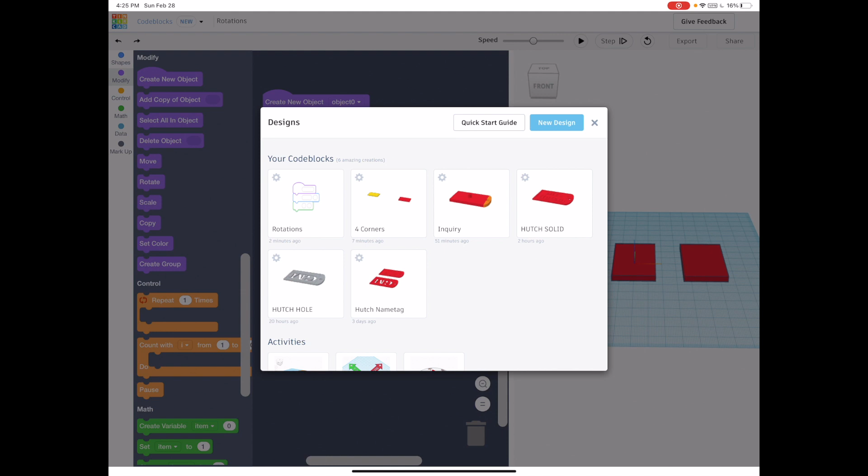All right, we are on your next challenge, which is going to be called grouping.

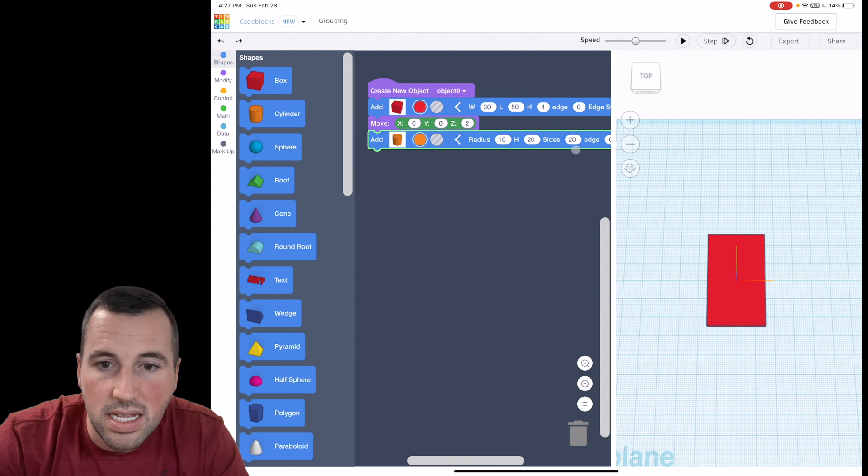So let's go ahead and add a new shape. We're going to pull down the cylinder. Okay, and right away open up the drawer, and let's go ahead and get our cylinder adjusted here.

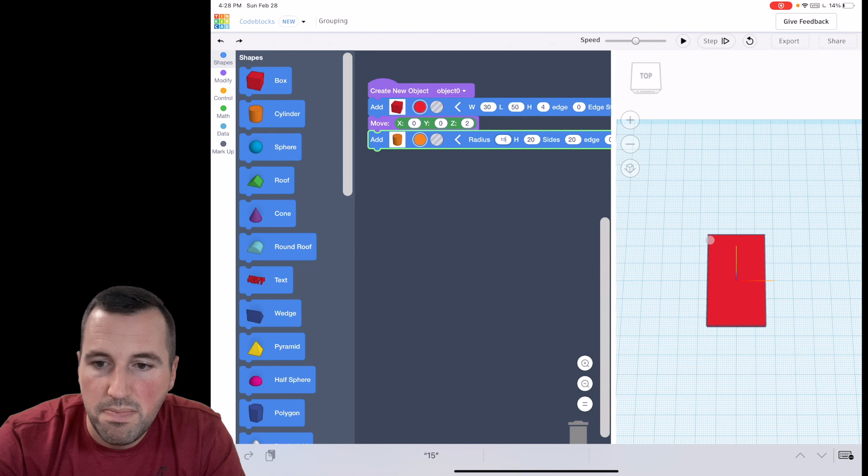The width of my rectangle is 30, so I'm going to have the radius match that. Remember, it's a radius, not a diameter, so we're dealing with halves. So if my radius is 15, then it'll be the distance of 30 across.

Let's go ahead and bring out our move block just because we know we're going to have to. And I'm going to zoom out a little bit here so we can see what's going on. And then our height is at 20. I definitely don't want a cylinder that big. Like if you take a look, that's pretty giant. That's definitely not what we're looking for.

So I need my cylinder height to be matching our rectangle, and that is a height of 4. So we'll go ahead and do that and hit play.

All right, so now it matches, but we got to move it up from underneath the work plane, and I already have my move block there, and let's go ahead and raise it up. So now you can see it gets all funky when it's meshed with it because it has to show both objects. So that's what that's doing there. Almost looks like a spinning wheel.

All right, now I want to create a shape up top that's sort of arched where like a keychain hole would go. And so we need to move it up this way on our y-axis.

Now, again, you could guess and check, and it's a valid method, but I'd rather just do it accurately. So here's the center of my shape, and I want to move it 10, 20, 25 millimeters up. And so I'm going to go to my y, and we're going positive 25. And let's hit play and see where it moves.

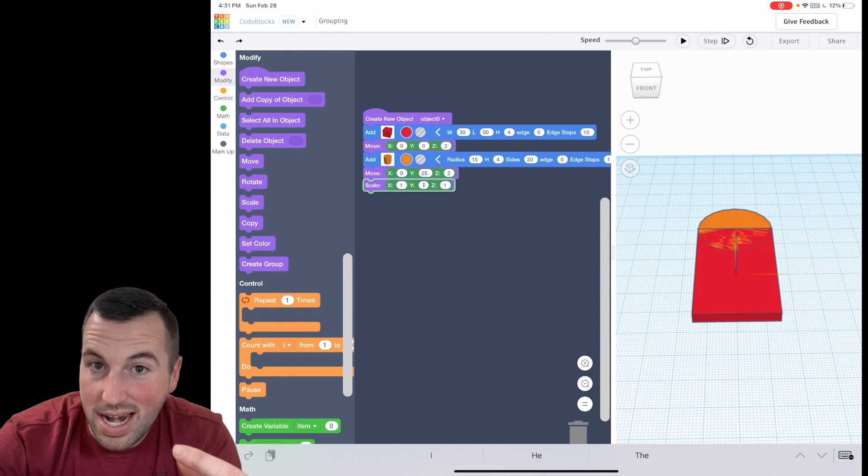All right, now we're reducing. So right now it's at 1. If I want to reduce, I have to go to 0.5, I'm reducing it by half. Okay, hit play. And there we go, it shrunk it up. Now, if you want it shrunk a little bit more, you can adjust those by tenths and shrink it a little bit more if you want. Okay, so it's all about just manipulating it how you want.

All right, now I do want to adjust those sides because remember how sort of choppy they are? I want them to be smooth. So let's mess with the edge and just increase that number like crazy, and adjust the sides. And we'll also do the edge steps. So we'll just put 200 on everything and hit play and see if it smooths it out a little bit.

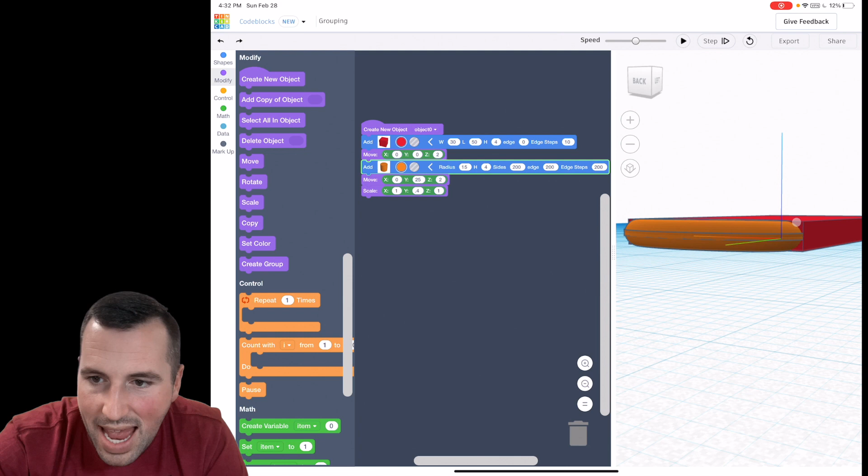Oh yeah, look at that. That's beautiful. Super nice and smooth. Now, one thing I got to be careful about is I smoothed it so much that if you look here, I sort of lost some of my edge here. So that's something I have to be aware of. If I wanted that to be sort of a solid thing, I'm going to need to get that adjusted back a little bit. So let's mess with our edge and edge steps here and see how we can get that back. So it's always good to look around the shape and see what's going on as you go.

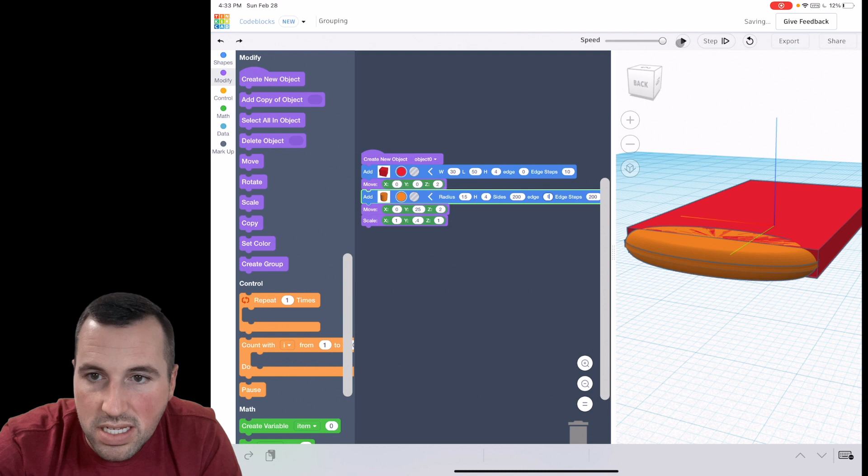We'll speed things up a little bit here. So edge steps didn't do anything for me, so I'll go ahead and put that back. That didn't do anything at all. Let's check edge, let's go back to like 5 and see what happens. Okay, that just made the top part have a flat top.

Let's get rid of sides and just do 5 and see what that does. Okay, and that just made everything sort of polygonal again. So I definitely want my sides to be high. And I want my edge to go back up.

Actually, maybe we want this all to be back at 0. Let's see, 1, 1, 1. Let's see what happens. Well, that's not very nice. What about 0, 0, 0? Okay, so look what happened there. We got our edge back over there. Let's see if we can just smooth out this top without losing that spot there.

So let's see our edge steps. Okay, it looks like we're good there, and it smoothed it out some. So let's try 20, just adjusting our edge steps. Let's try 200, go extreme.

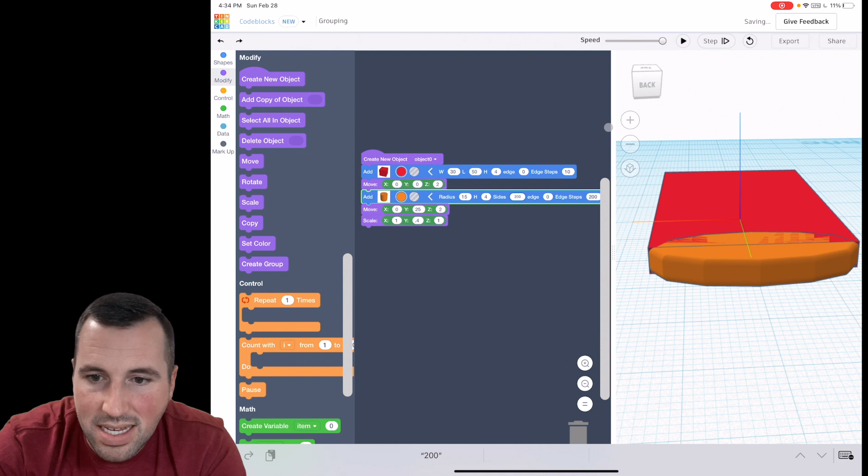Okay, let's check our edges here. If I do 1, okay, I lost that with edge, so I can't mess with my edge. Let's increase the amount of sides. There we go, look at that.

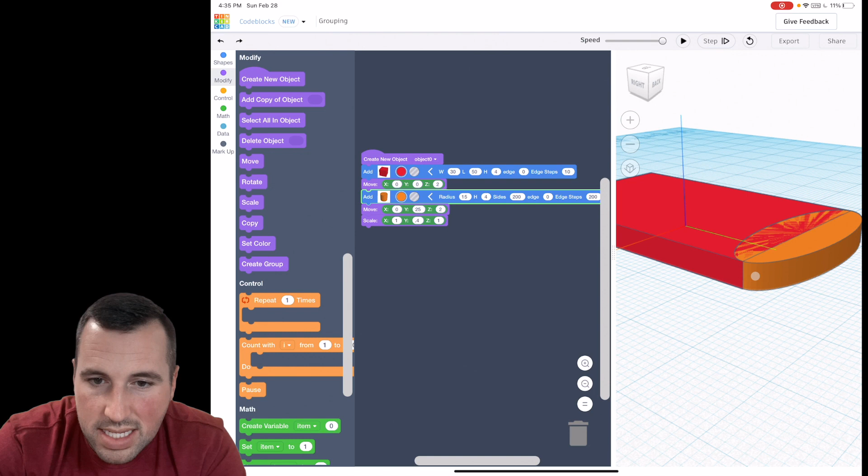All right, so look at all the manipulating we had to do to get that to be what we want. You have to look around your shape really carefully. You can't just look at one angle. So now I got it how I want. So we increase the amount of sides, so you can see there's tons of little sides there. We increase the edge steps. But as far as edge goes, we left that at 0.

All right, now that you have that created, let's go ahead and move to the next step. So it's good for you to see me work through that, because that's the kind of stuff you're going to have to figure out as you go as well.

All right, now that you've done that, right now these are two separate shapes. You can still see the other one there. So we need to go ahead and group that. So we're going to bring over Create Group. And this means multicolor. If you want everything to change to red, then you can go ahead and do that. That's what you'll do for your keychain project. But for this one, go ahead and keep it multicolor. That way we can see the two, so I can see what you did. We'll hit play and group it, and you can see that everything that was touching goes away.

Okay, now we're going to do two more things, and that is a peg that is grouped sticking out and a hole. So let's go ahead and bring over another shape. So we'll bring over the cylinder. We will open that up. And you're just going to have to mess with getting the right shape with that.

So I'm just going to preview this a little bit with you and then let you go ahead and tackle it. You can pause the video and then I'll continue and show you what I did to finish it off, if you do need a little bit of support in seeing what it's supposed to look like. So your overall objective for the rest of this is to create a peg that's sort of like the size of a keychain hole for a keychain ring.

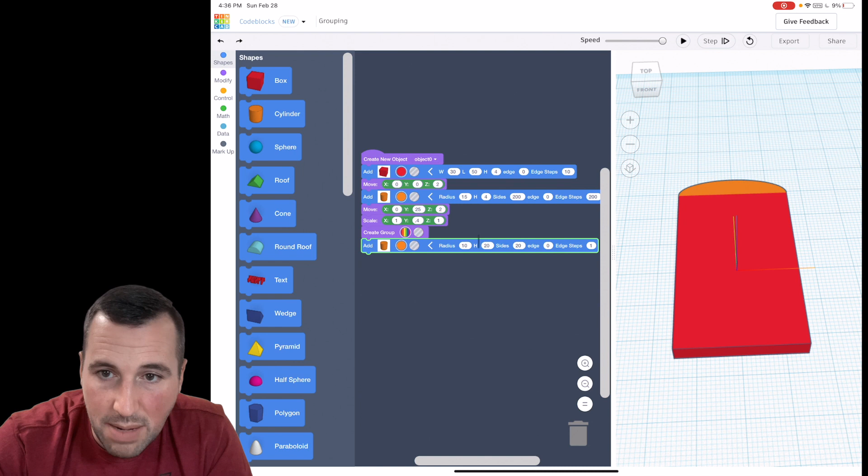And so, for example, right now, if I hit play, you can see it creates this giant cylinder. Well, I don't want that. So we're going to have to reduce our radius by quite a bit. If I go like 1.5, you can see I have a nice size peg hole there.

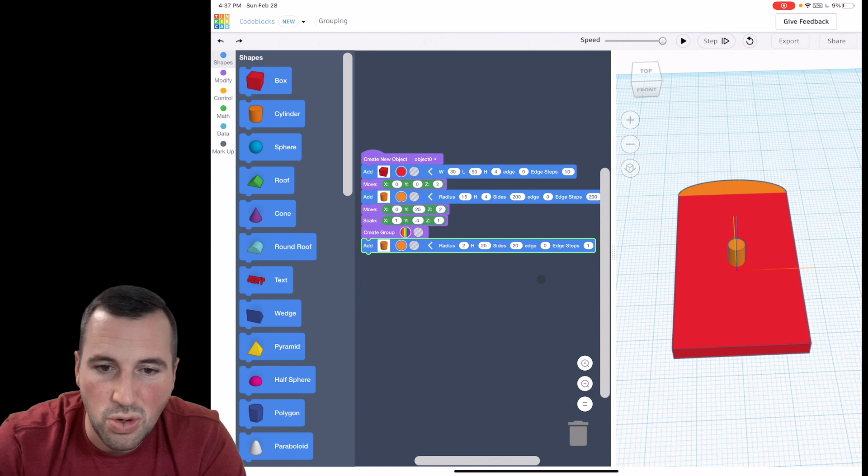And remember, that's in millimeters, so it's still pretty small. So maybe I'll do 2. You always got to be thinking about what your actual product is looking like. All right, so now I have a good size peg there.

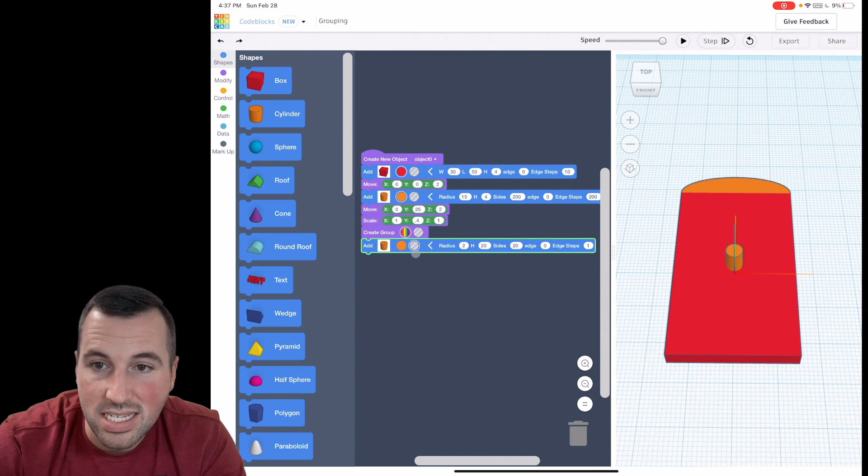Look how it sticks out the bottom and the top. That's fine for making a hole, because look how I make a hole. All I do is, over here, it's clicked on solid. If I click on hole here, it's actually going to create that shape as a hole. So watch how I hit play, and it is a transparent shape sitting there.

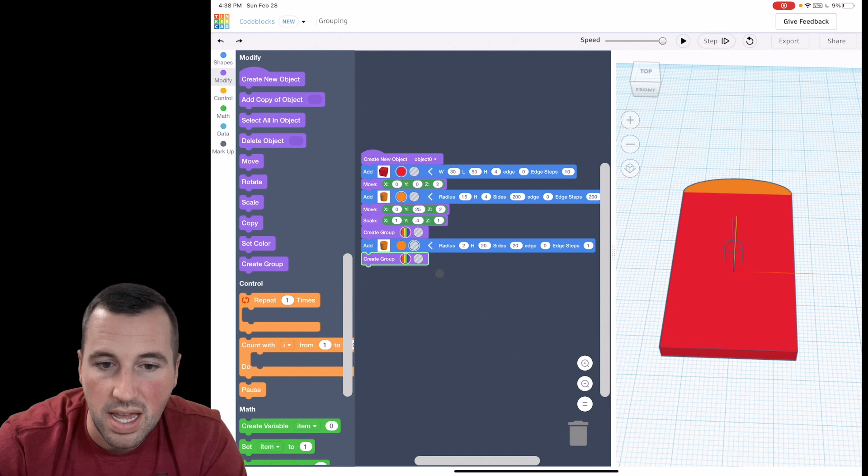Now, it didn't actually cut through because I didn't group it yet. If you want to cut through, you need to go ahead to modify and create a group and group those things together. Now I'll go ahead and hit play, and you can see that when I grouped the hole with the shape, it cut a hole into the shape.

Now we're going to move this empty hole up to here. Don't get it too close to the edge. And then we're going to make another cylinder and just have the peg sticking up out of the top surface. I don't want your second peg sticking out of the bottom. I just want your peg going from this rectangular prism and sticking up out, and then group it.

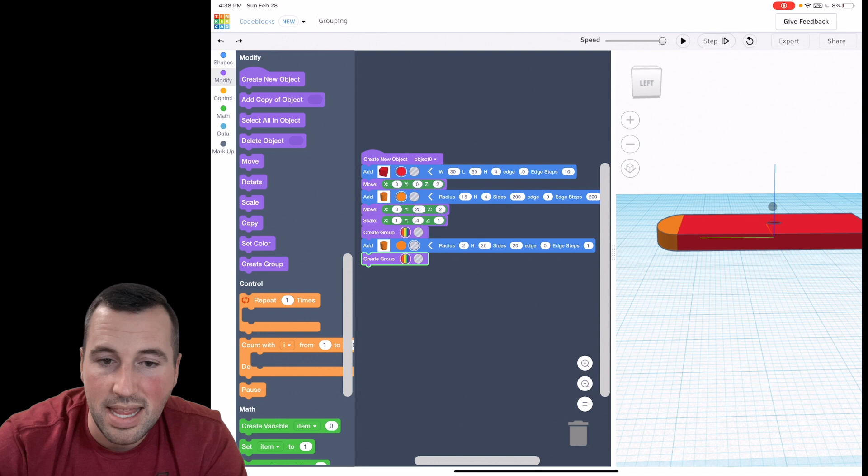So you have two peg situations: a hole that's grouped, and a peg sticking up out of the surface and grouped. Once you have that, check and make sure yours has those components and looks similar to mine after pausing the video, and then you can go ahead and take a screenshot of this, and at that point you're done. So get all your screenshots together from the prior activities, put them on one document, and then you can send that to me.

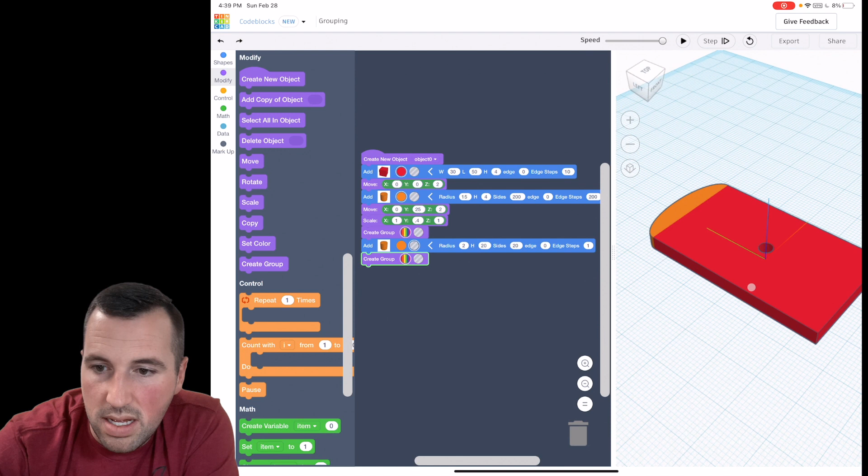All right, if you're back to check out the final product, you can see that I still need to get my other pegs in there, and I need to move that. So what I'm going to do actually is, instead of messing with pulling out everything new again, I'm going to just duplicate this by holding and duplicating and then tapping the screen. And then I'll pull that down because I know I'm going to have two pegs and I want them the same anyway.

So there's my one peg, and I need to make sure that one peg is solid. So we'll have it be a solid red. And then I'm going to do another peg that's going to be my hole. So I need to make sure it's clicked on the transparent button there. So let's just see what happens. I'm going to hit play.

So I have my peg with the hole and the peg all in one spot, which does not work for me. So I need to get my move out and move those where I need. So let's go ahead and put this here. We'll get the pegs moved out of the way of each other.

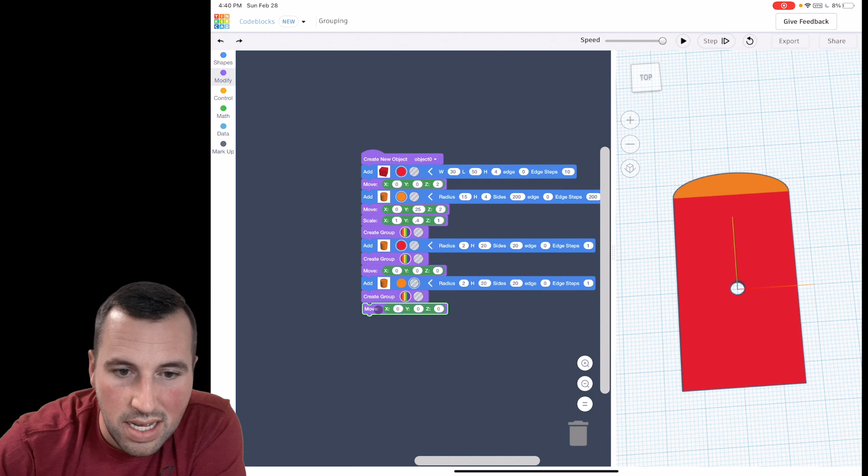I don't really need to move the main solid peg on the X or Y. I just need to get it up on the Z plane. But my hole I do need to move towards that orange, so that's my Y axis. Again, I could guess, but I don't need to. Let me look at our work plane. We have 10, 20. 25 is here. So maybe I want to move it like 26 or 27 on the Y axis.

All right, and so because it's a hole, we actually need it to stick above and below, so I'm not going to raise that one. But this one, it's a height of 20, so I need to get it up out of there by raising it up 10, but I actually might raise it up 11 to get it off the surface there. Okay, and then we'll group both of those. I need my move to be right before my group, though.

So we're not going to create the group. We're going to move it, then we're going to group it. Okay, and we're going to move it, and then we're going to group it. Because grouping it is sort of like gluing it all together. So you got to group it at the end. All right, let's hit play and see how it works.